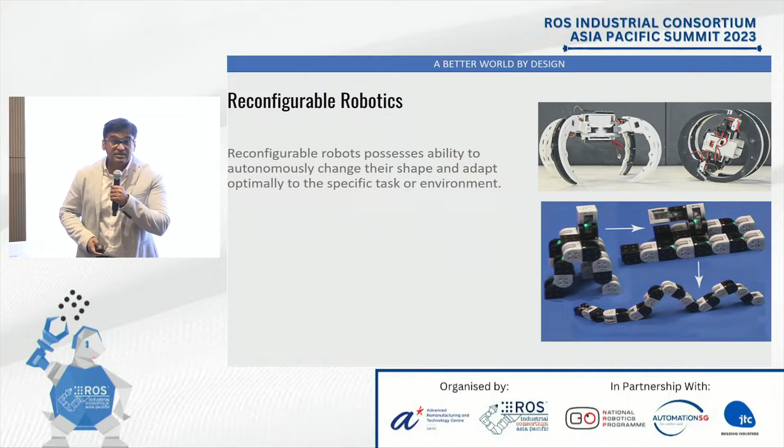So I will share with you some of our robots, not all of them, to give a quick insight. The very first robot I want to introduce is Tetro. It's a Tetris-inspired floor cleaning robot.

How many of you are using a floor cleaning robot or have seen one working in homes? Please raise your hand. Yeah, so many of you here, right?

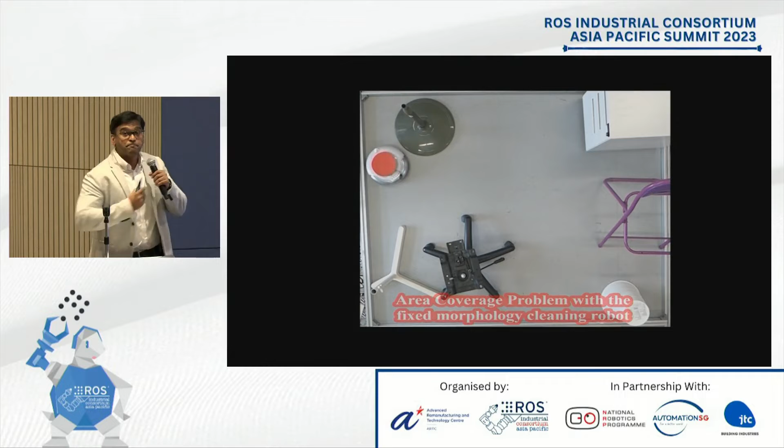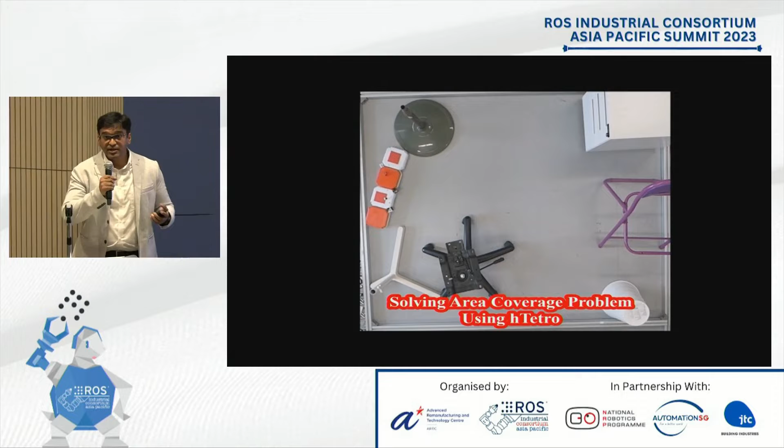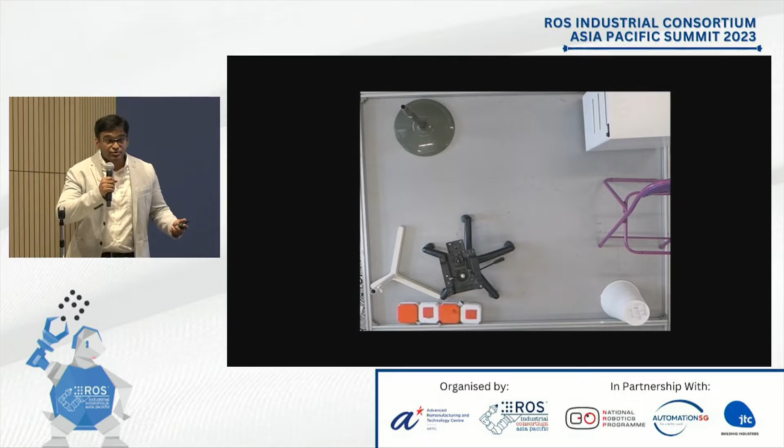So now this Tetris robot can detect and assume a form factor so as to maximize area coverage. We have about 8 different variants of this robot - one with purely bump sensor, LiDARs, ultrasonic sensor, IMU, wheel encoder, to ones with 3D LiDARs, infrared cameras, cameras on board, from simple to complex in terms of sensor sophistication, also in terms of cleaning payload, vacuuming to mopping to scrubbing, small and big.

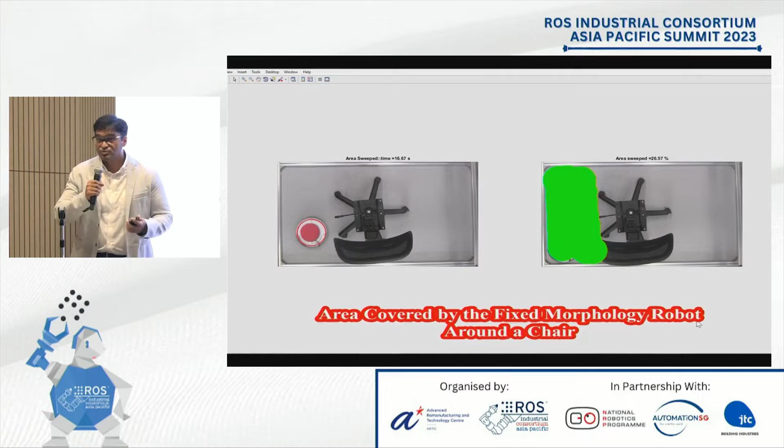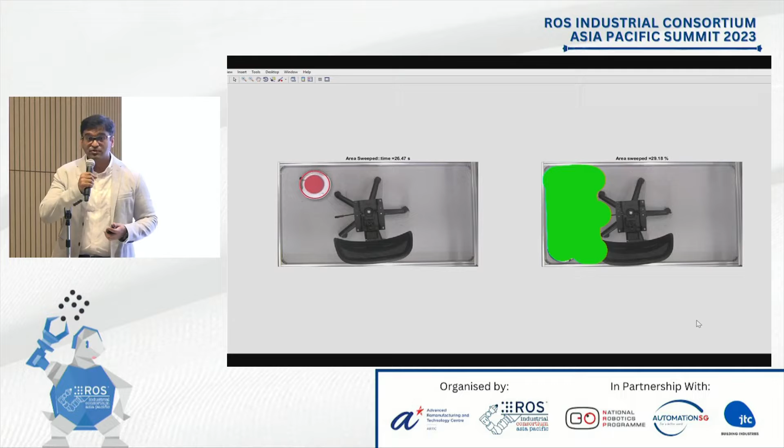So we also ran a performance comparison of our robot with other robots in the market. Just because this commercial robot cannot move to the other side, the area covered as observed by an overhead camera is less than 30%. Whereas with our Tetris robot, it can assume a shape, move over to the other side, cover and clean the area - in this case, over 90%.

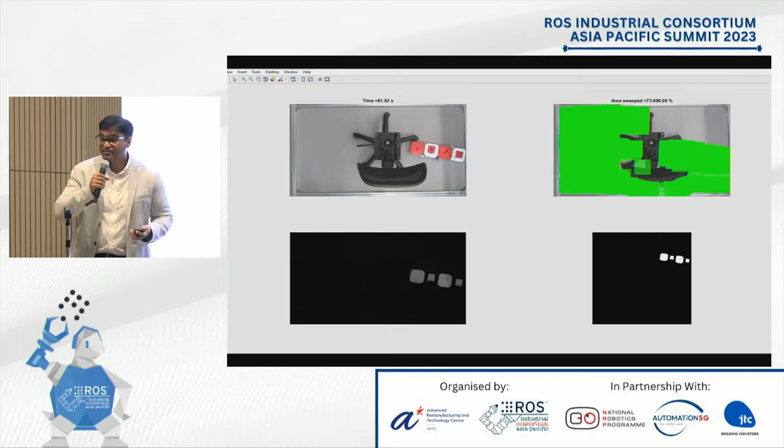So again, to achieve that, the robot need not have sophisticated autonomy or perception. It's simply the ability to shapeshift. Then, with higher order sensors, the robot can classify objects and assume different speed, different form factor to access the places. So we have developed a number of applications with this category of Tetris-inspired platform, the Tetro.

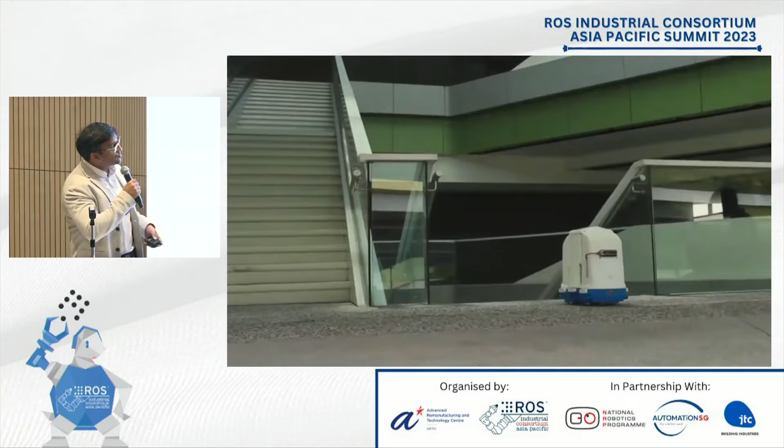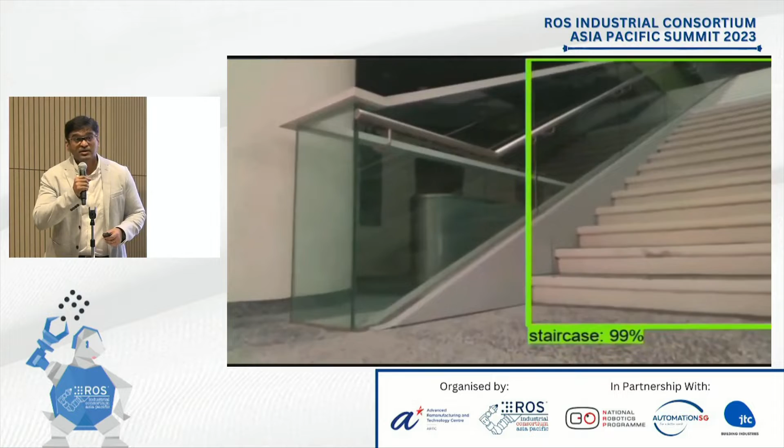So we took on staircase cleaning as a challenge. We now have 3 different variants of robot developed: one capable of ascending the staircase autonomously, one that descends, and a third variant that can do both.

So the platform can calibrate to different staircase height and width. The robot generates control primitives to achieve climbing, so it can avoid any obstacle, static or dynamic, while climbing the staircase. Again, the robot is equipped with capabilities to autonomously access multiple stories.

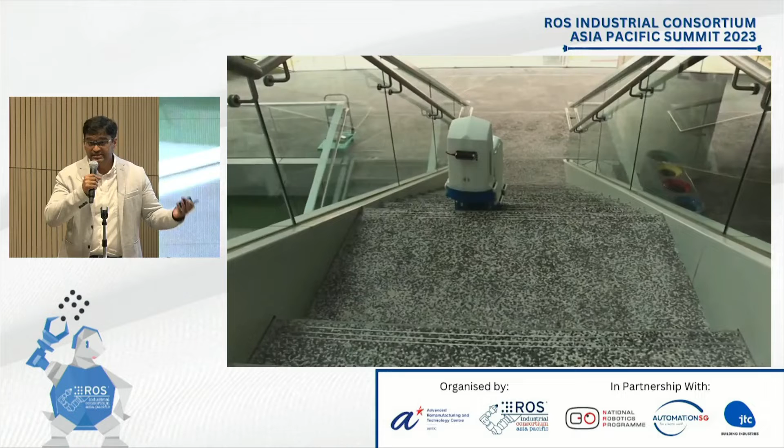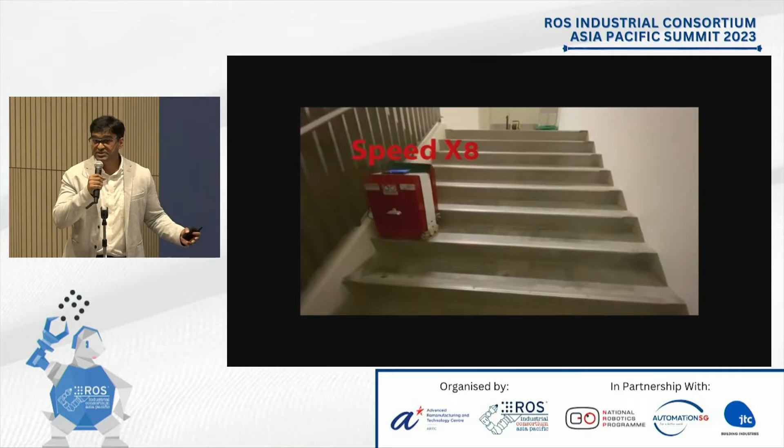So we ran trials together with Tampines Town Council and EM Services. We got very valuable feedback. At the moment, we are refining the system, especially with respect to safety - how can we ensure complete safety for a platform like this when there is no commercial precedence out there? So we are looking at safety aspects of the robot mechanisms that can ensure 100% safety.

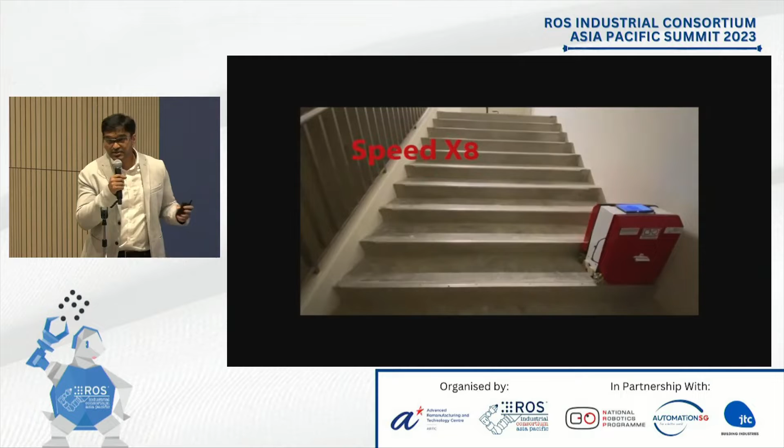Autonomy is very exciting with this platform, because the robot not only maintains a 2D map of the space, but also a 3D map of the space, with variation in the z-axis as the robot climbs and moves from one floor to another.

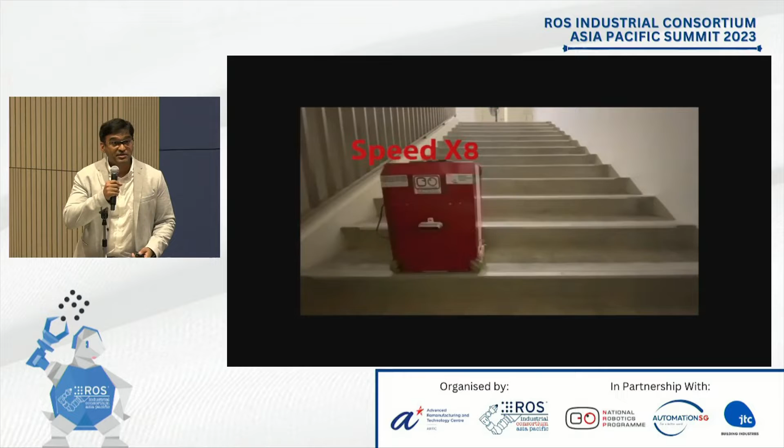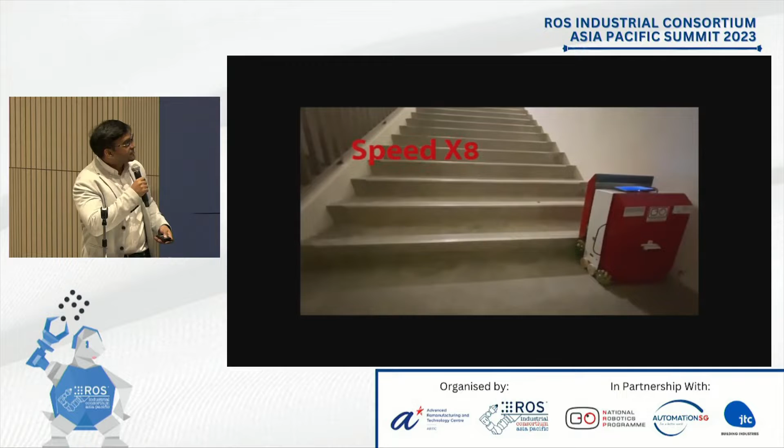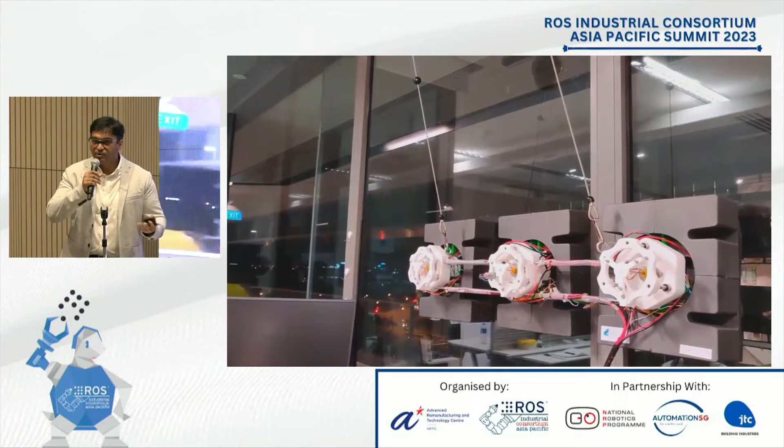It's also capable of cleaning. We have vertical robots that can clean facades. In this case, the robot cleans indoor facades, not high-rise facades. We took on this challenge as a trade-off with the amount of logistics needed, so the robot solves a very niche problem. With commercial robots, they can clean a single panel, but they cannot move between panels because of the frame that separates them. With our Mantis, the robot can move between panels.

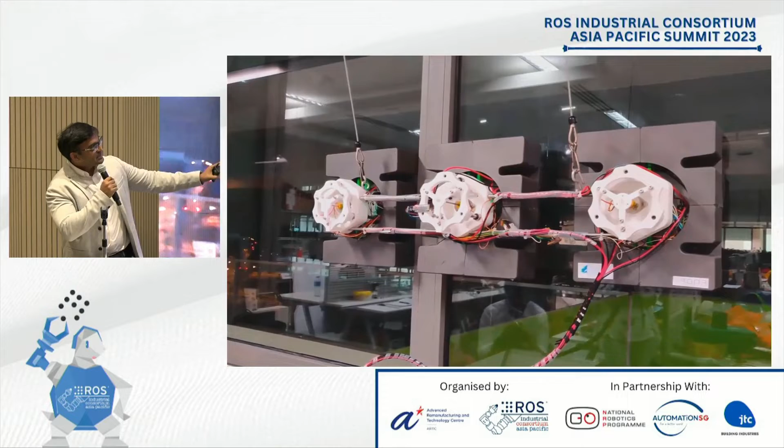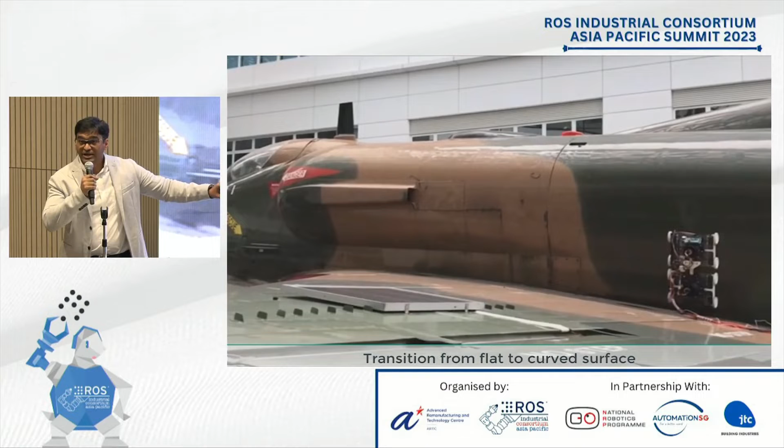The robot uses an impeller to adhere to the wall, and has a dry mop nanofiber cloth to clean. We also leverage this to support ST Aerospace with a robot for inspection of the exterior surface of aircraft. That was a leverage project where ST Aerospace invested in us to develop this capability.

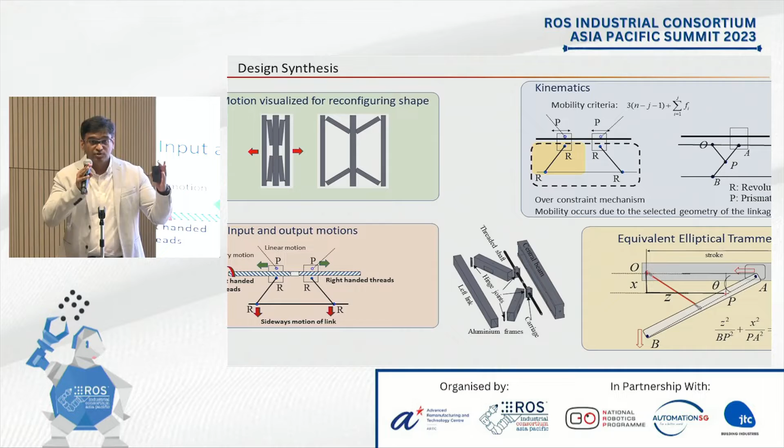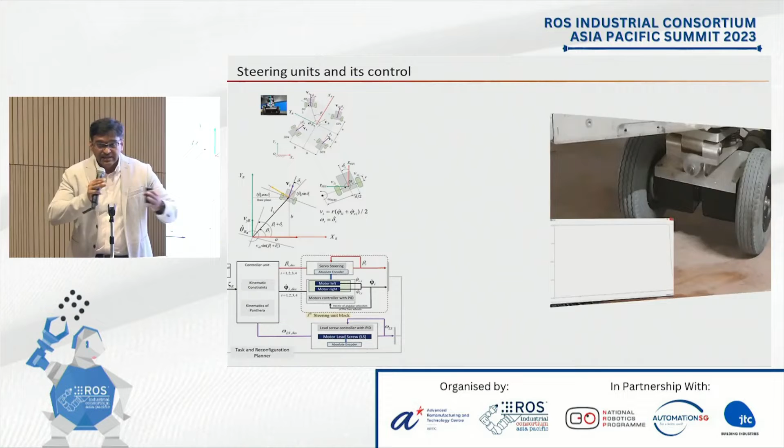It's not just that, we have large vehicle platforms too. We are developing an autonomous pavement sweeping robot, Pantera. We have two variants. One has the ability to compress and expand to adapt to the varying width of pavements. The robot can compress when there is a wheelchair user, cyclist, or people passing, and can expand to the full width when nobody is around, to be adaptive.

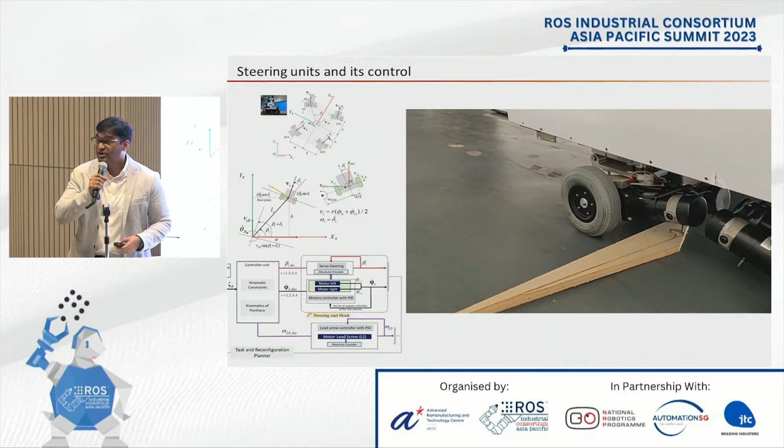We also have a second variant which is holonomic, which recently took the T1 test, and we have started trials at JLG, Jurong Lake Garden. We are working together with NParks, and have been deploying it since early this month. We'll continue our trials at Jurong Lake Garden and with a few other partners as well.

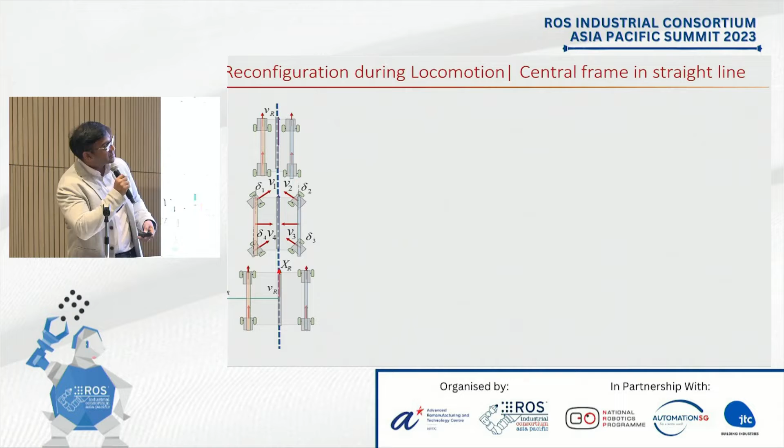So there are two variants: one with the compress-expand ability, and another that is holonomic. But again, in this case, it's a vehicle-class outdoor cleaning system.

It's not just about cleaning we deal with, we have goods moving robots too. This is an exciting project where another aspect of reconfigurability can be observed. Our hospitals in Singapore are big supporters of robots, and thanks to them, every hospital has hundreds of robots.

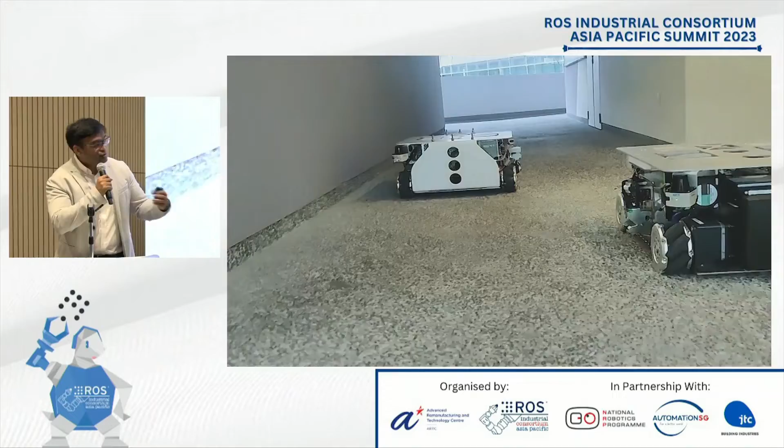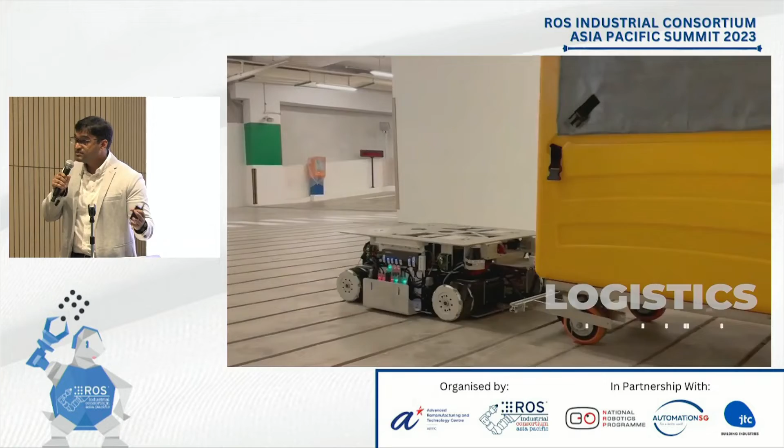They are at the front line of any new challenge that emerges in the case of large-scale robot adoption. With Changi General Hospital, they have close to 200 robots doing goods moving, bringing trolleys, handling linen cloths, food, and medical logistics. It's very good, but they have so many different types of robots, small robots for small material handling, large robots for large material handling, and this has given rise to so many different types of robots.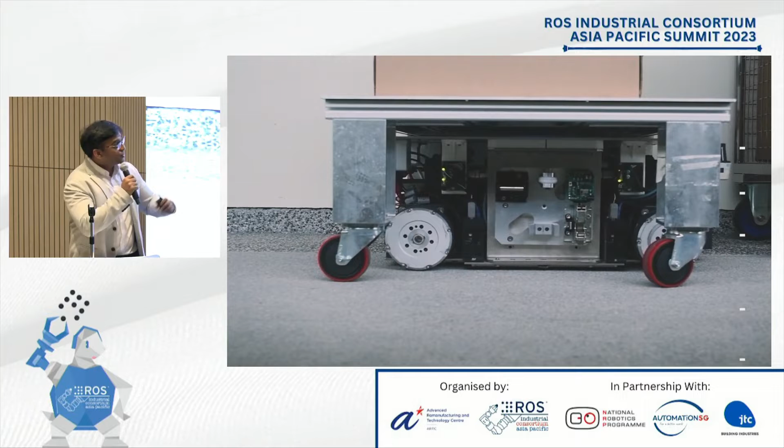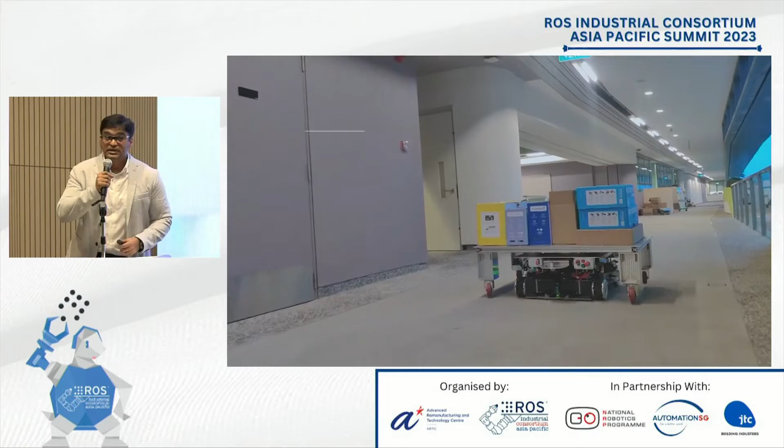So they approached us to develop a new type of cellular robot for goods handling, where when there is small goods to be handled, one unit can be used, and when there is a need for larger goods, one can simply put 2, 3, or 4 robots together. So we developed WASP, a new category of robot. The platform can lift objects from the top, and can tow objects and trolleys. We had a 6-month pilot period together with Changi General Hospital at the hospital, integrating with RMF and trialing wireless charging as well, in partnership with a local startup.

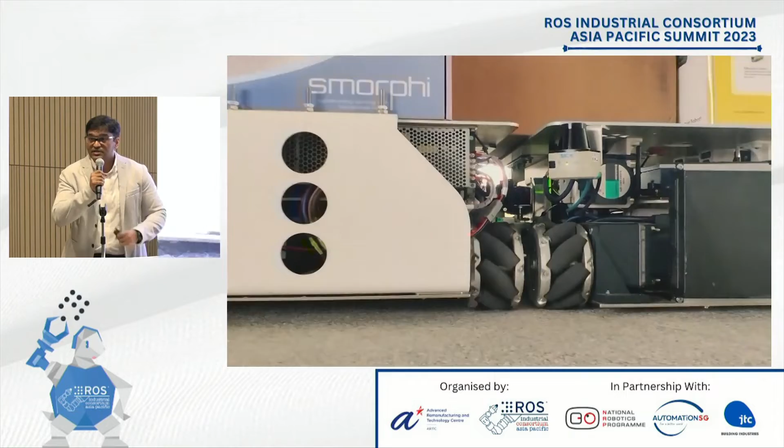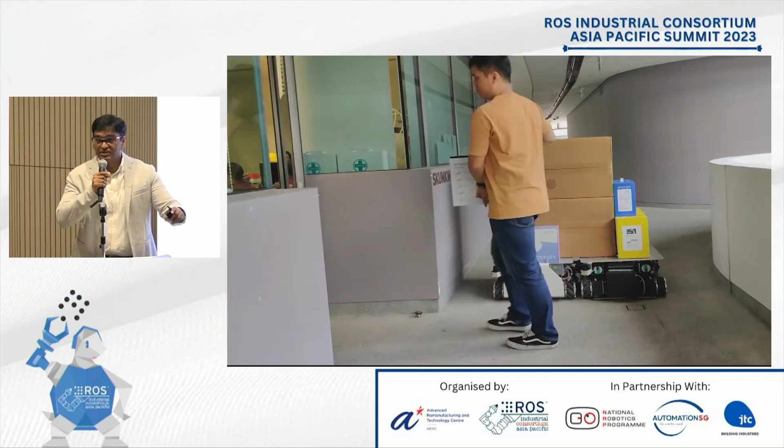So when a larger payload has to be carried, 2 robots can be connected together. At the moment, connecting 2 robots requires manual intervention, so we have ongoing work to do this automatically, where one can say 'WASP 12, go and connect with WASP 7,' and WASP 12 will seek out WASP 7 and automatically dock with each other. In this case, the capacity is significantly increased.

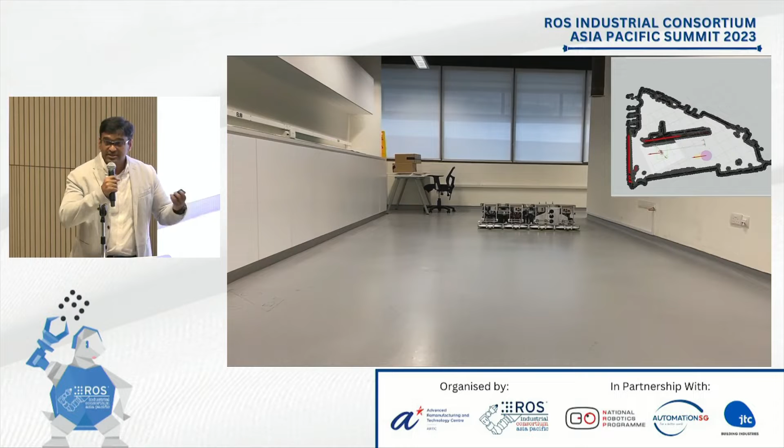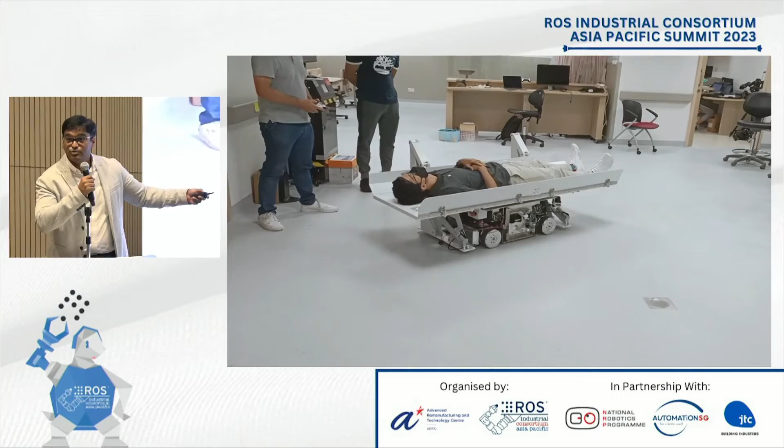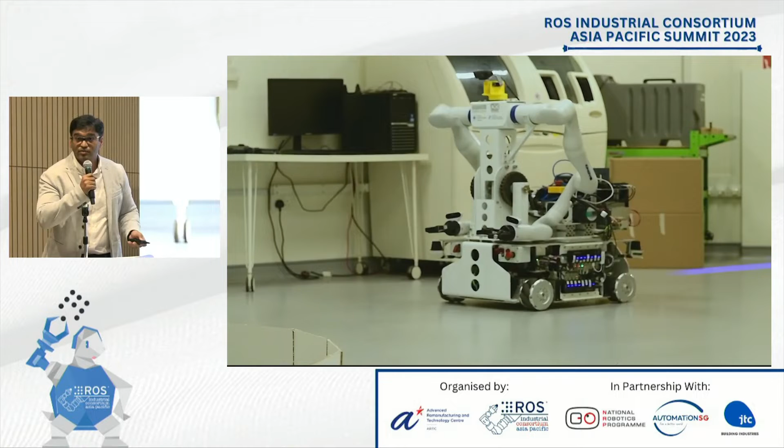We also trialed other applications since we already successfully finished the task of goods moving, and there is an enthusiastic bunch of engineers, so we explored other applications like wall cleaning, even patient handling, where a patient can be ported from one place to another. This can be from the ground and beyond, just to prove the versatility of the base platform. We also had a bi-arm system implemented on the robot to scale further.

So again, moving from many wheeled robots, I also want to introduce one cool piece of work we developed with the Temasek Lab at SUTD, funded by the Ministry of Defense. Here we developed a transforming robot for an urban reconnaissance mission, a security mission. The background is this: an urban building is held hostage by hostile forces, and security personnel have to get information from the building.

The traditional approach is security personnel themselves moving into the building, which is very dangerous for them. There have been recent products like throwable cameras which can be thrown in to see what's happening, but cameras cannot move.

There are some use of robots, but many of these robots are big, bulky, difficult to port, easily observable. So MINDEF posed a challenge: can you develop a transforming robot that can crawl, roll, and climb wall with a rolling diameter of less than 10 centimeters? Also be autonomous, also capable of working as a team.

We took on the challenge and we delivered a robot. But when we started, there was no precedence at all for a robot that can crawl, roll, and climb wall. We looked to nature for inspiration.

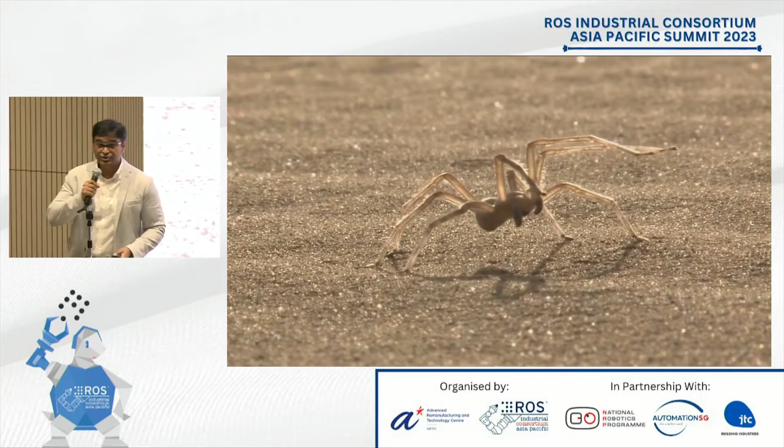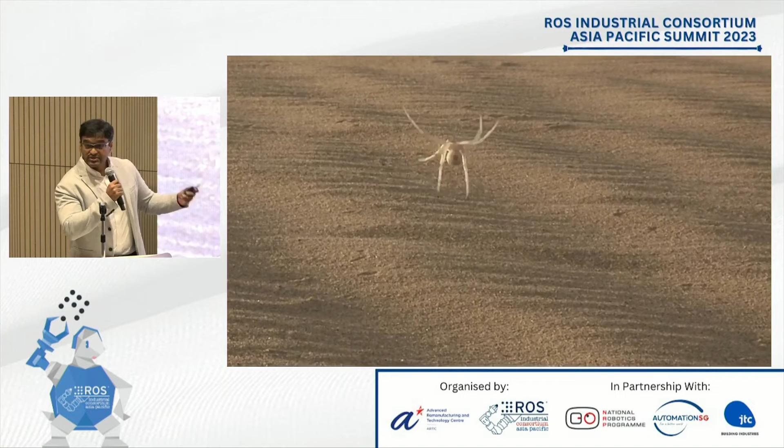That's when we came across Cebrennus rechenbergi, a kind of huntsman spider only found in the deserts of Morocco, nowhere else. Because it's an endangered species, we could not get the spider, so we got a lot of videos of the spider and observed it. This is not animated video, this is a real video of the spider. So the spider can crawl, it can roll, and it can climb wall. A perfect precedence for us to study.

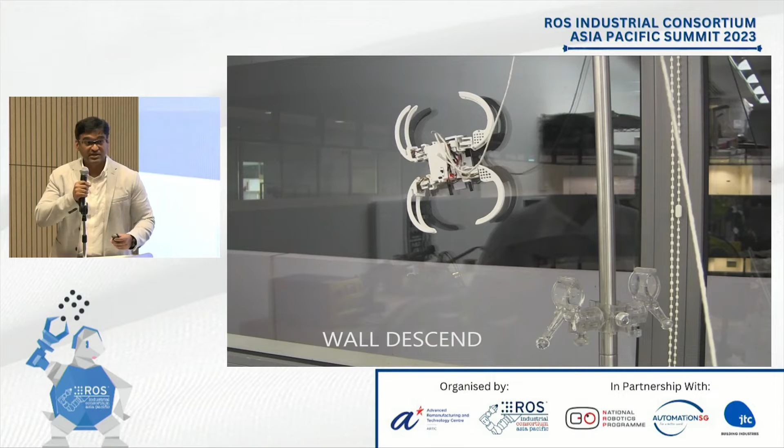So we studied again and we developed a robot that mimics the locomotion of the spider. With climbing, we have nanomaterial skin in the underbelly that enables the robot to climb. And the same robot is capable of crawling and rolling.

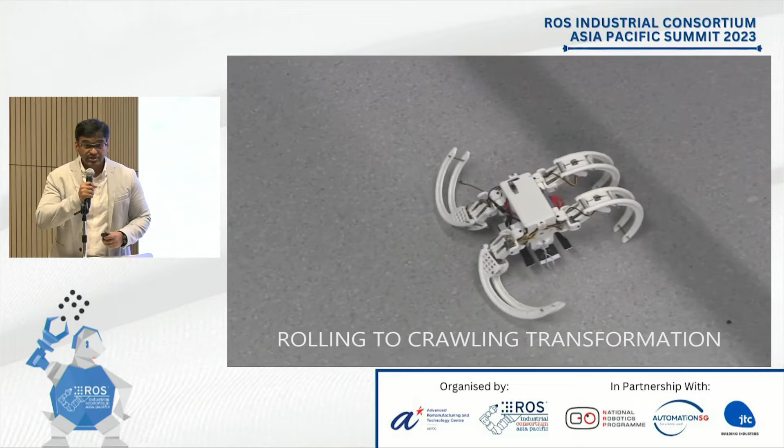So it was a 4-year project. We did over 30 different challenge statements that we met, like energy-aware behavior, where the robot stayed alive for 21 days, intermittent operation, coordination with a team of 10 other robots, and many more. The project was successful, and we were able to meet all the different requirements.

So it's not just that we build robots in our lab. We do a very important thing for proliferation of robots in a big way. We work very closely with urban planners, architects, and interior designers to make buildings robot-friendly. That is very, very important if we want to scale up robots.

And this is not using active components, but purely passive interior design, passive principles in urban design. We can increase, for example, observability as a criteria. We all know that when there are no features in the environment, it's going to be difficult for the robot to navigate, right? So how can architects design in-built principles when a new building is constructed, or evolve an existing building, so that it becomes easy for robots?

Going back to the goods moving example, if hospitals are using close to 200 robots, then robots become a critical stakeholder to consider. So here we develop principles. We have practicing architects in our team, urban planners in our team who contribute and develop these principles.

So we contributed to the BCA's Design for Maintainability guidebook. Working closely with BCA, we now have a new chapter on robotics and how building owners can evolve their existing building or construct new buildings considering robots of the future. And this is going to be a very, very important topic.

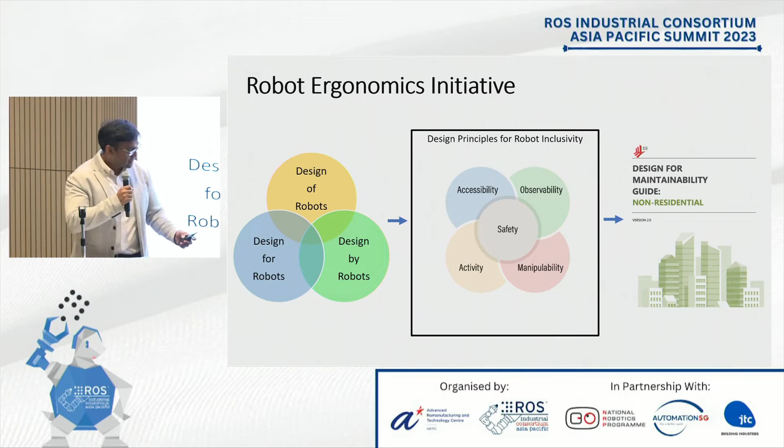Also, we work with a number of partners. They make our robots meaningful. In fact, we actually meet a company every week. This can be a building owner, or a service company that delivers services to introduce our robot. Then they come up with a problem statement, or evolve our robot, or pilot our robot in their place. So this helps us to translate our robot to the industry. You can see there's a whole spectrum of companies where we have trialed or piloted our robots.

Also, industry invests in us. Industry come to us with a problem statement, and they invest in us to solve it. This can be MNC companies like Toyota, Rohde & Schwarz, it can be Singapore large enterprises like ST, also small, medium enterprises and startups that come to us, and we develop through the research collaboration agreement.

And we have successfully transitioned over 10 technology licenses to commercial companies so far, which has gone to products, and we see them also going global at the moment. Beyond that, my lab has 4 startups that have been inspired from my lab.

The more mature of the startups is LionsBot. LionsBot is now 6 years old, and I'm a co-founder of the company. The company is, by different market studies, the 3rd largest in manufacturing cleaning robots. We have over 2,000 robots now deployed in 30 countries. In Singapore, we make our robots—every one of our robots is manufactured in Singapore and shipped out to these 30 countries.

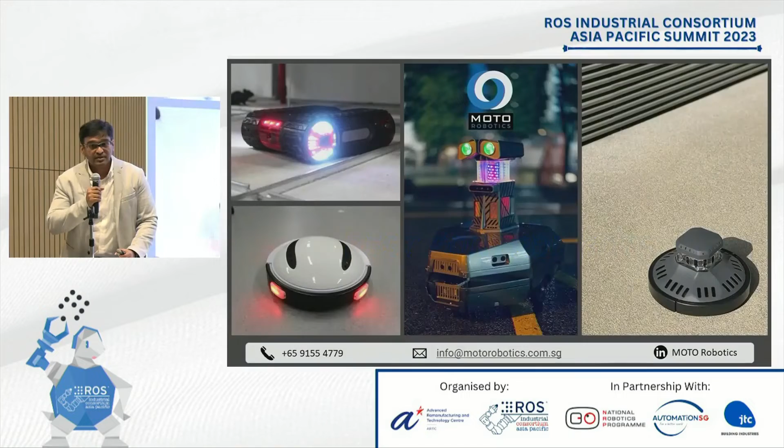So here we have developed different classes of robots that target pest control, and we have commercially deployed robots as well. The company has 3 classes of robots: one targeting mosquito control, another rodents, and the third snakes.

If you are from NUS, you may have seen this robot running in the Techno Edge canteen every day, catching mosquitoes. Techno Edge canteen is one place where both LionsBot robot and Dragonfly from Moto are deployed - one cleaning floor, another catching mosquitoes.

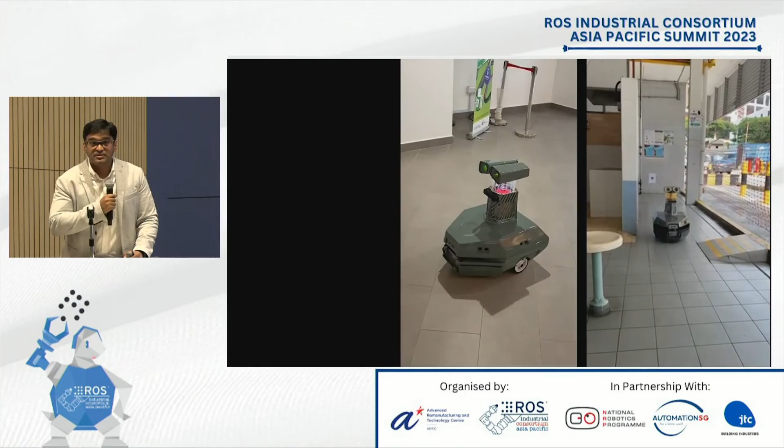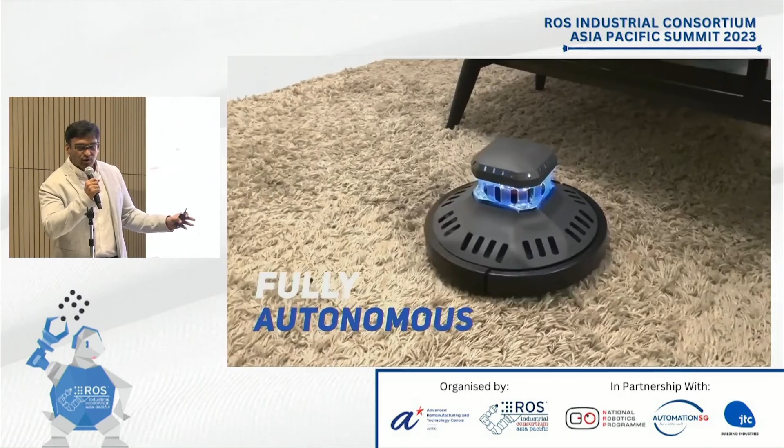So Koi is the residential equivalent. It looks like a floor cleaning robot, but what it does is attract mosquitoes and insects, and trap them. Naja is a snake repellent robot.

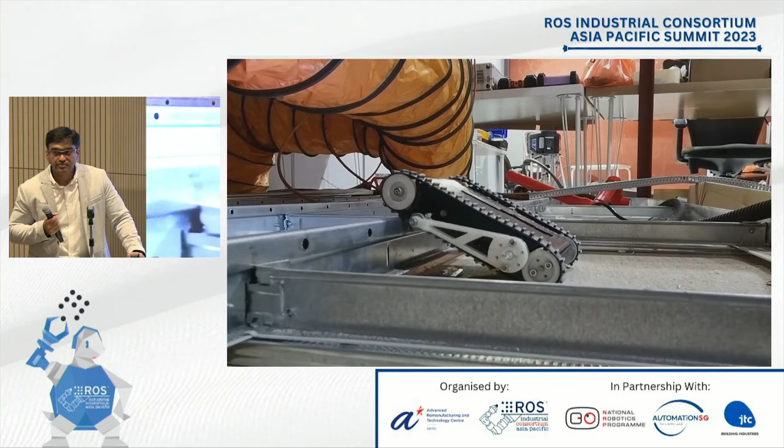So again, Moto is opening new markets where robots have never been used before. Mosquito control and snake control have never witnessed the use of robots, and now Moto is breaking open new markets, new countries and applications. So Oceania is the third company inspired from my lab.

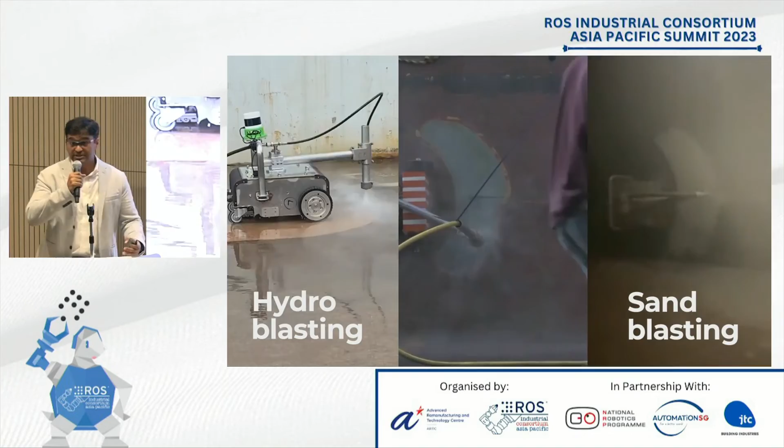Oceania designs and manufactures robots for marine maintenance, especially for water and abrasive blasting. That is very much needed in shipyards with marine contractors to remove biofoul and paint. This is a niche industry where robots are often treated as equipment on rental. These work processes are at times dangerous because of the water pressure or abrasive pressure they have to deal with.

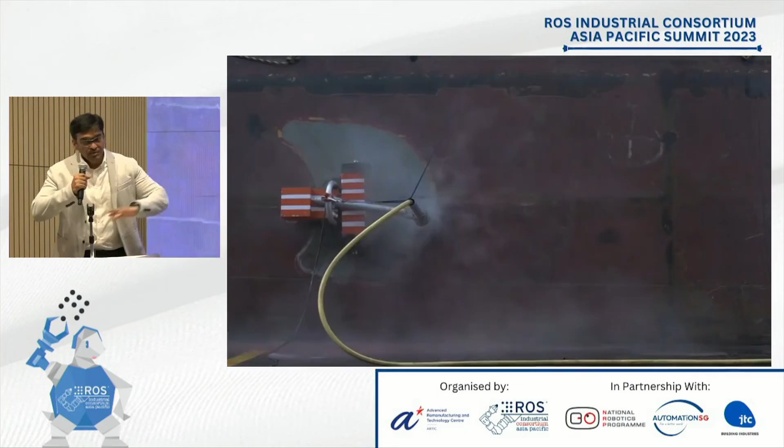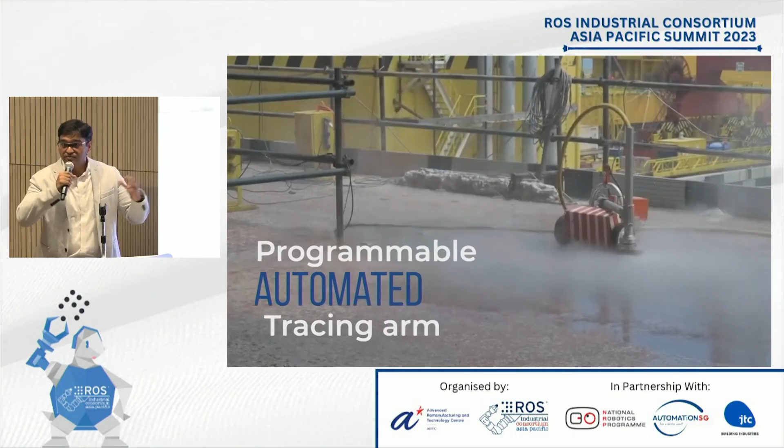These robots use magnets in their underbelly to attach themselves to the surface of the ship hull, move, cover, clean, remove biofoul, remove paint. This was on an oil rig at Keppel Shipyard. You can see how dirty and ergonomically unfriendly the place becomes. So these are jobs perfectly suited for robots, and more and more robots are coming to take on jobs such as these.

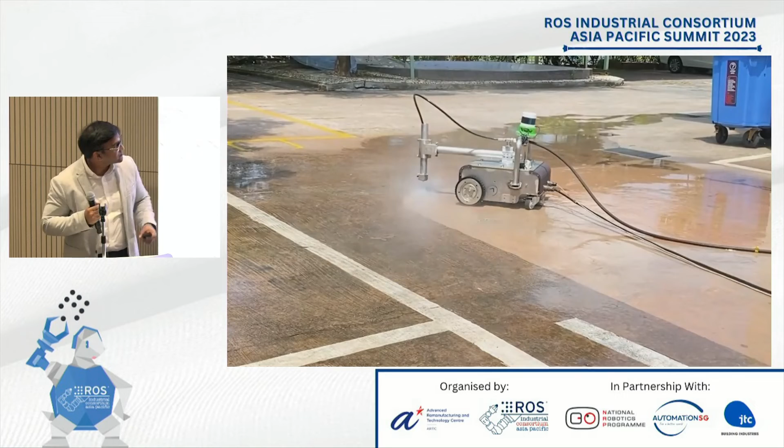So with these developments, we were looking at what is the next industry. And what immediately came to us is that the source of all these successes are people, and people have to be trained in robotics. So let's go and make educational robots. So the last and most recent company is Viva Robotics, that designs and manufactures educational robots.

The company leveraged and licensed the Tetris robot that you saw in the first video. They have been selling the robots in the market for over 1 year now. We have over 200 robots sold in 12 countries, so that's a perfect validation. We recently closed our seed round, and we are expanding to hit our 10,000 units target.

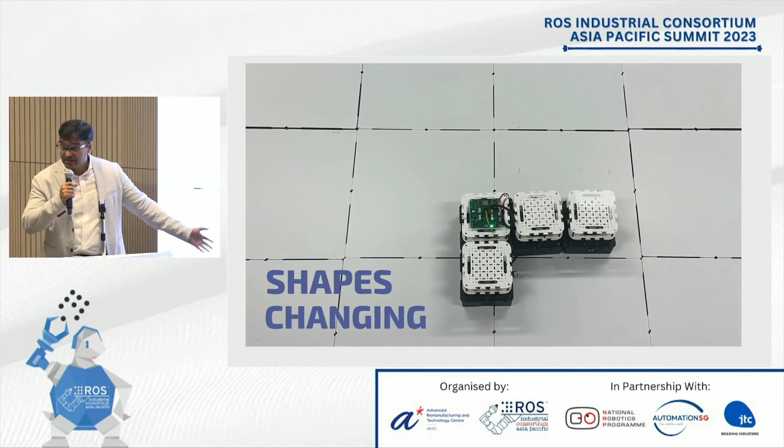A short video - again we see the robot used in universities, high schools, polytechnics, kindergartens, enrichment centers in the US, in Europe, in Africa. We have our robots in Central African Republic, in tiny Bermuda, and in different parts of Asia - Vietnam, China, India, Indonesia, Japan.

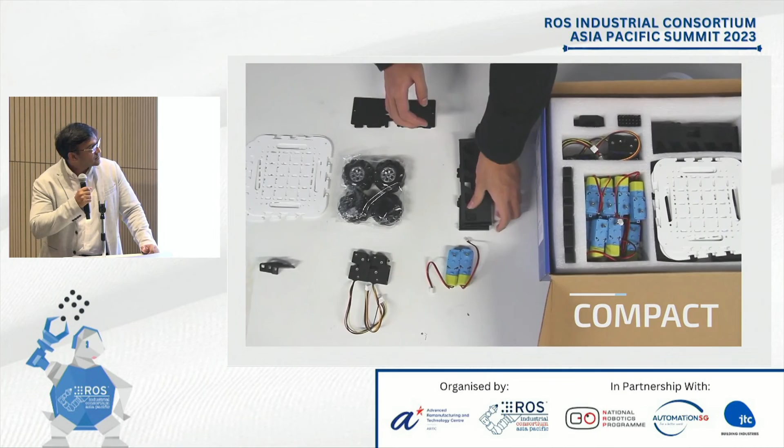Again, it's the very first Tetris-inspired robot for education. It offers modularity in learning, where the robot can be broken down from a single unit when one-to-one learning happens, and units can be combined together - 4 block, 5 block, 6 block combined - to take on a task.

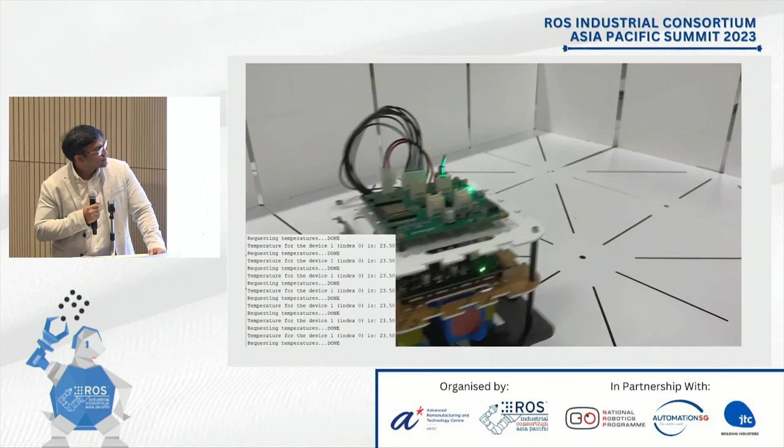So the platform is holonomic, and it supports simple sensors to complex sensors, and is ROS enabled. We had a successful run of ROS bootcamp 2-3 months ago, and we will have one for today.

Again, competitions - the robot is becoming a favorite, standard platform for competitions. 2 months ago, Science Center announced that this robot would form a new third category for the National Robotic Competition, the largest robotic competition organized in Singapore. The same is true with competitions happening around the world.

A RoboROS competition conducted at Zhejiang University in China used the robot as a standard platform. We will soon have a RoboROS India hosted by Amrita University, where we will see over 300 students participating.

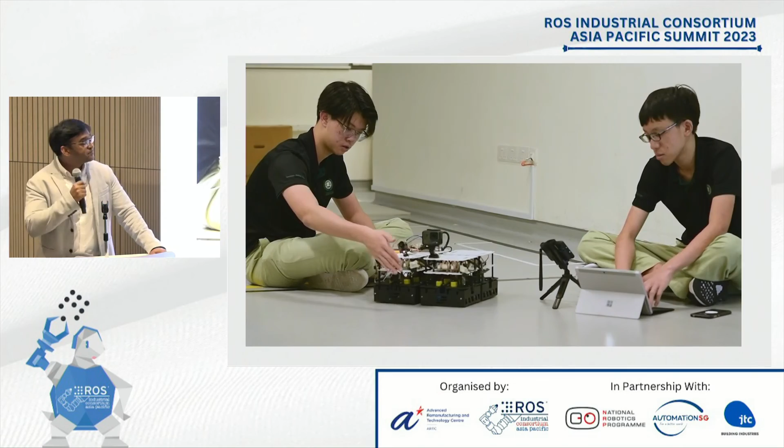These were students from junior college who developed an application for tennis ball recovery. This was an outcome from a design thinking course, where students were given the robot and had to solve a problem. Two of the team members were tennis players, and they quickly coded the robot to take on the task.

So WIFA is now on all continents except Antarctica. Our idea is now to scale up with new growth. And one thing you can see with all the robots I presented, there is a commonality - all robots are powered by ROS. ROS is a big enabler for robots that span from home cleaning to wall cleaning to ship cleaning to logistics to education to catching mosquitoes. So we really want to be part of the community, collaborate with all wherever possible, and contribute to the ROS community, to the larger ROS community in every way possible.